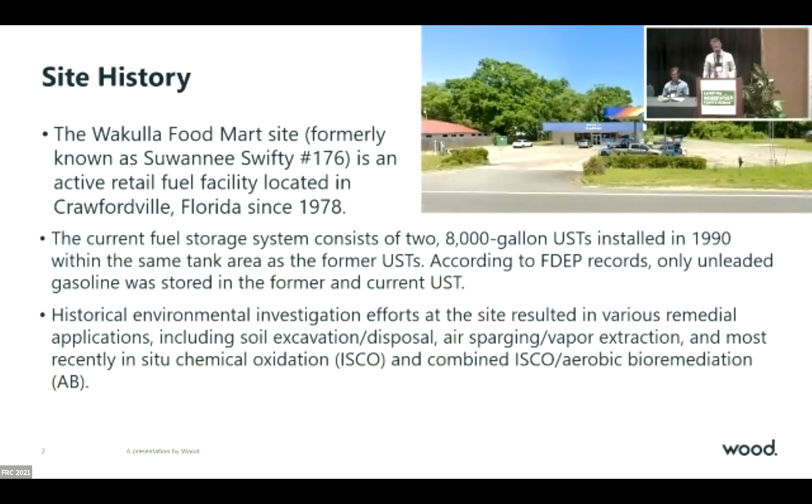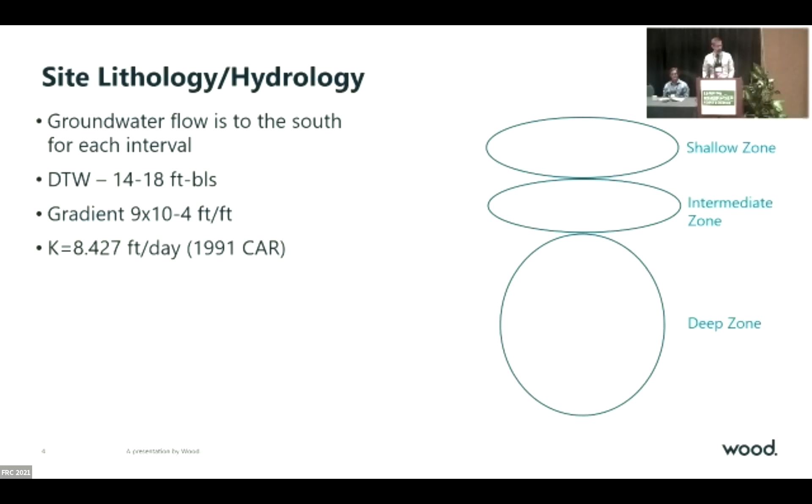So we identified three zones here, but that was just because those were the depths at which the wells were installed as we were chasing the vertical extent of contamination. There are no confining units between those zones to actually separate them from one another. Oh, there it is.

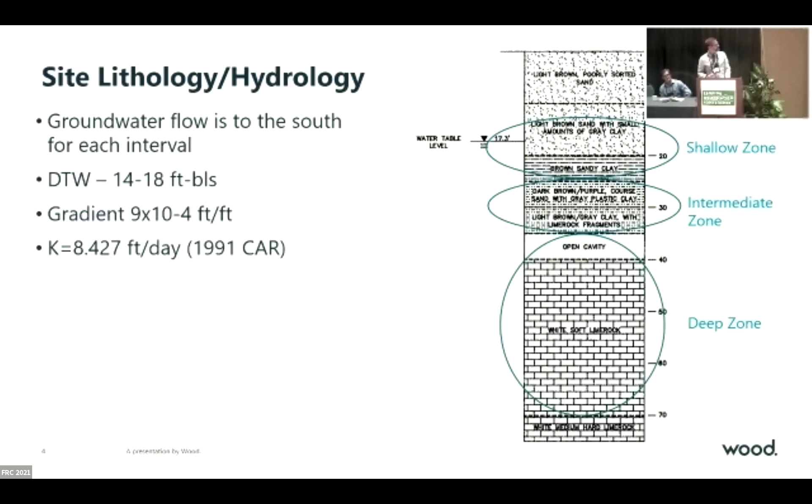Okay, so there's your lithology cross-section, like I described. Again, there was only unleaded fuel stored at this site. The discharge notification was in 1987 under the EDI program, and tanks were removed. When they removed them, they dug out about 2,000 tons of material, so there really wasn't a ton of soil contamination. Matter of fact, the CAR said there was no soil contamination on site.

Later on, they did a RAP for an air sparge, SVE, and a pump and treat system. But the SVE was just for vapor capture—it wasn't geared towards cleaning up any soil contamination. In 2013, the system got shut down, mostly because DEP was transitioning out of the petroleum pre-approval program into the PRP program. The site had reached NAM levels, so they were shutting systems down. That's the main reason the system got shut down.

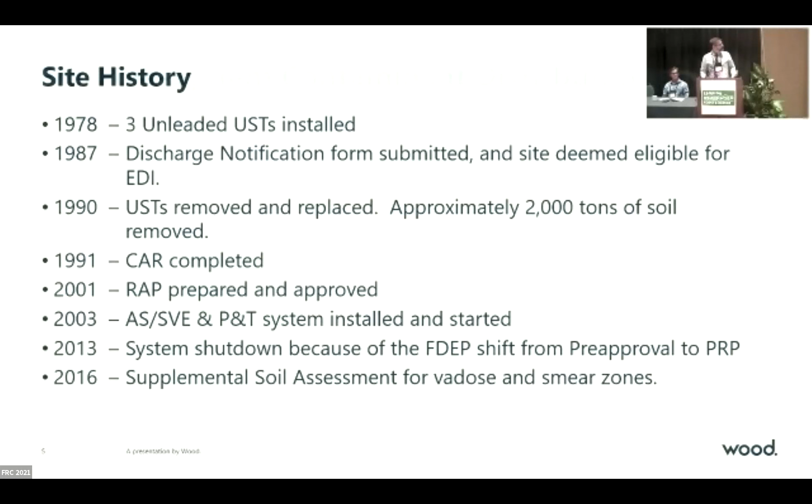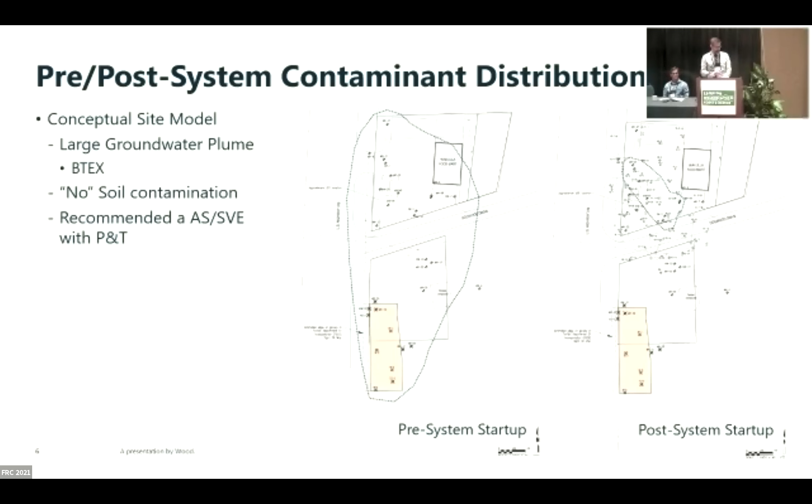So DEP authorized us to do a supplemental site assessment. We suspected there was probably still some soil contamination on site, since we were seeing increases in concentration and had rebounded above NAM, which indicated to us that it was probably a source. We went out and did a bunch of soil borings, collected soil samples, including SPLP and all that good stuff, and identified a relatively significant smear zone and some residual groundwater that we already knew we had.

There actually was no soil contamination on site, which was a pleasant surprise. But because we have a pretty good smear zone, anywhere from 14 to 18, 19 feet, and it was in that clay-ier zone, the system that was in place was just never going to cut it at this site. So we looked at pursuing a new conceptual site model that identified these things and the areas we really needed to target to move forward towards closure.

DEP authorized us to prepare a remedial action plan modification, which we did in 2016. We looked at a bunch of different options, including reinstalling a system—we did have some infrastructure still there, like the air sparge wells and SVE wells. We ultimately decided against that, and were leaning towards doing some kind of in situ remediation at this site.

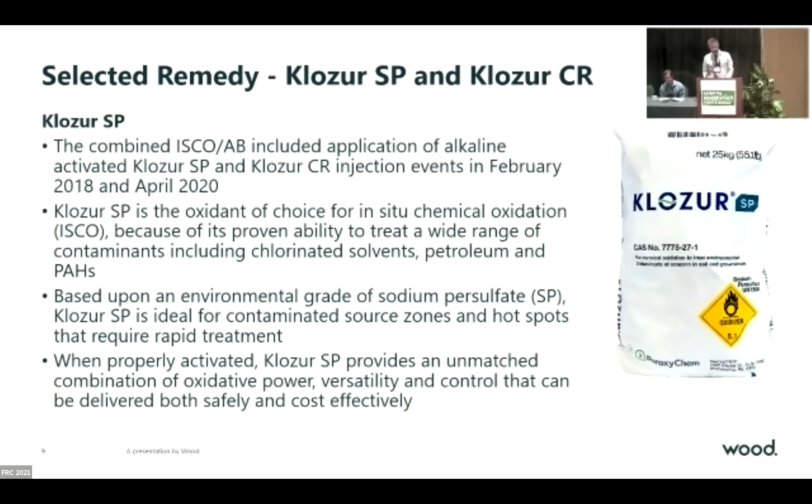So for closure, we use two products: Klozur SP and Klozur CR. Klozur SP is a sodium hydroxide activated persulfate, and we use this in the groundwater zone from about 18 to 26 feet. It's basically an NaOH activated persulfate, giving you three different radicals—a sulfate radical, a hydroxyl radical, and an O2 radical—which serve to attack the organic molecules effectively.

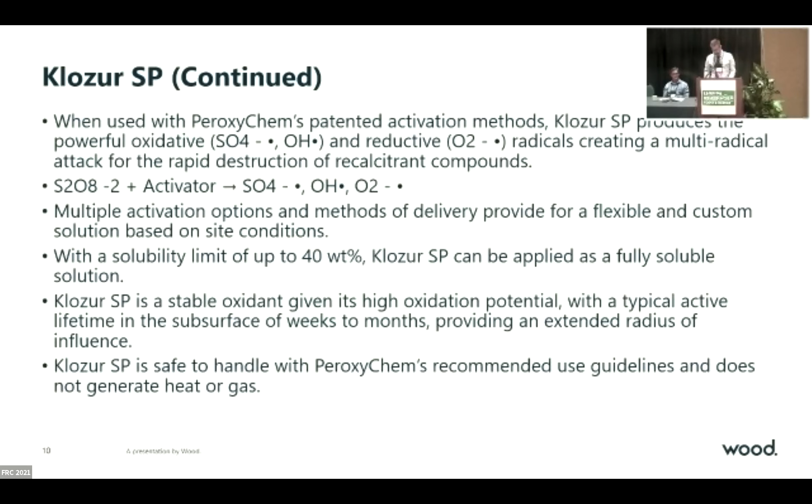Additionally, the persulfate is a longer lasting chemical compared to a Fenton's reagent. It activates in the groundwater and is persistent for generally 3 weeks to 3 months, depending on the actual site, versus something that might be over and done with in a matter of days. So it gives us a slightly larger radius of influence.

So again, the Klozur CR is essentially just the SP product combined with the Permeox Ultra, which is a calcium peroxide product that is basically self-activating. It allows us to not have to inject the sodium hydroxide. So it's a good product, and we chose it to use in the soil areas because if you're pumping the hydroxide in, we find that it doesn't work very well - it doesn't stay there, it likes to go down into the water, and so you don't get as good of activation. Whereas if you're co-injecting them together, the self-activation of the decomposition of the Permeox allows that to actively treat the soil contamination and the smear zone contamination in this case.

So the CR also, because of the Permeox, we get a big DO boost in that. So it provides, after the persulfate has done its thing, you continue to get that degradation of the Permeox, and because of that you get an enhanced bio effect afterwards. It also has been shown to provide an anaerobic bioremediation. Once that DO is gone, you have the sulfate residual from the sodium persulfate, and you can get anaerobic biodegradation from that. We have not seen it at the site, but that is a tertiary benefit to the Klozur CR.

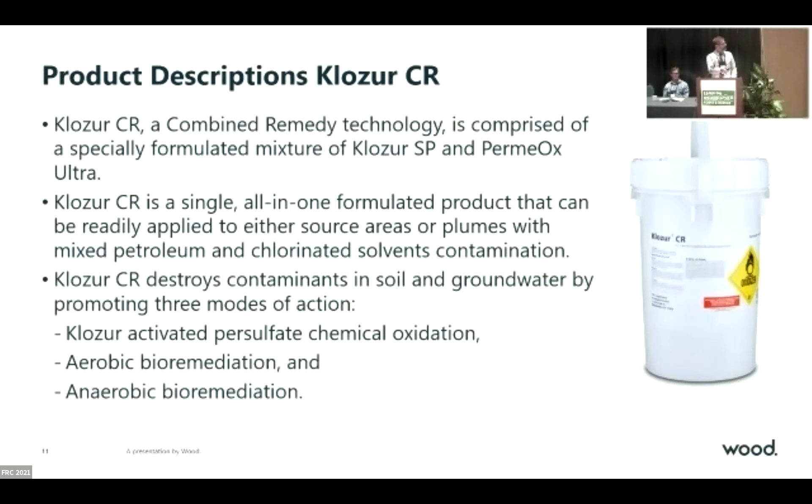So in addition to doing the phase 1 injections, the offsite property owner, who is not the same RP, said get your stuff off my property. So we went out and removed all the infrastructure. The remedial system was on a slab, and there were a bunch of horizontal or angled wells under the road here, so we removed all the well vaults and all that kind of good stuff.

And then later on in 2020, he asked us to remove the infiltration gallery, which if anybody's removed one, it's good fun. The rock was actually in quite good condition - good enough that FDOT allowed us to move it to their yard down the road, and they reused it for rock base later. So if you're in a position where you have to remove one, this was in quite good condition. I was surprised - I know John talked about a lot of iron fouling, and we expected a lot of this rock to be cemented together and be really difficult to move, but it was actually pretty easy.

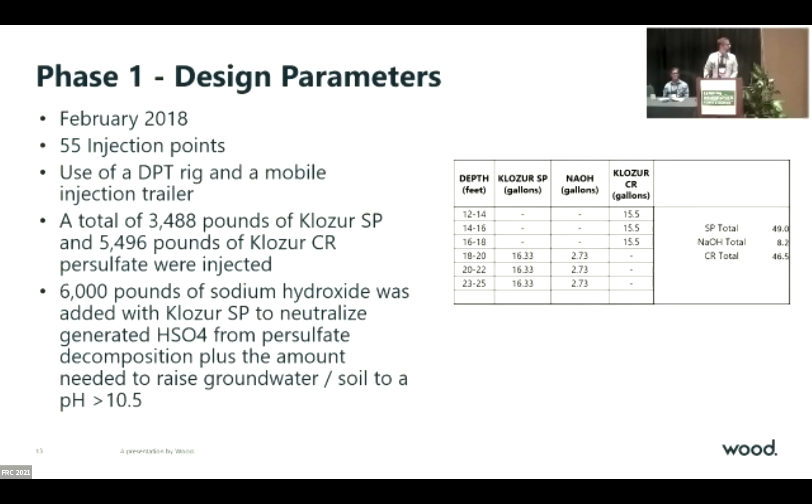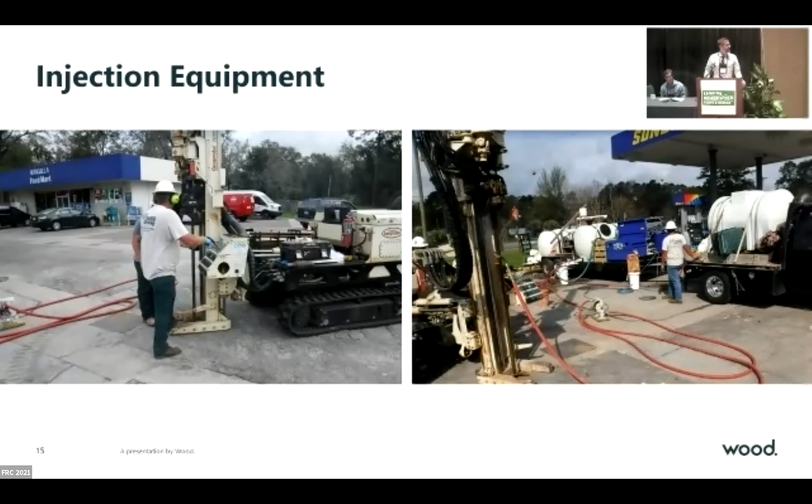Here's a photo of the phase 1 injections. Huss Environmental Drilling did this for us, and they did a great job. You can see just a regular DPT rig connecting to the top of the well - you can see we're injecting these things right there. The UST pit is right there next to the canopy and partially under it, and we injected right next to it, had no problems with anything, and it was really effective.

I guess I should've given Chad credit for the phase 2 injection, but I don't have any good pictures of them, so they didn't get included.

So, thanks, Chad. For phase 1, the injections were right at the NAM levels, but we knew we'd never get there, and concentrations were going up quarter after quarter. Xylenes were really our driving parameter, somewhere around 220 to 250, just above natural attenuation. Benzene and ethylbenzene were well below that but still above GCTLs.

And with every injection chemical we use, there's a UIC zone of discharge parameters we have to monitor. In this case, there were 5 we had to keep track of: TDS, sulfate, sodium, manganese, and iron.

The other location was the shallower zone, and it had a lot of contact with that smear zone. The other wells, even though we found smear zone concentrations in those areas, showed no impacts from desorption from that smear zone. So we really just focused on those 3 areas for the injections.

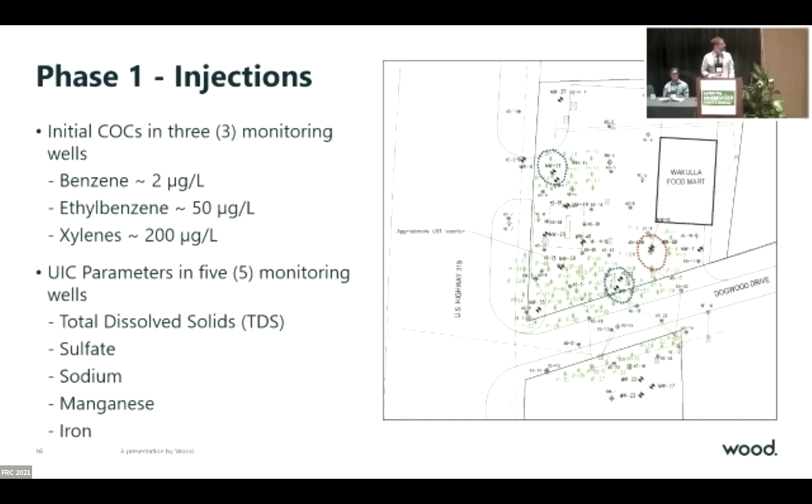So we did the injection. It took about 3 weeks to do those 55 DPT points. Afterwards, all the intermediate contamination was gone, consistently below GCTLs, and we've never seen it come back since then.

However, the area around MW6 did have some rebound. Well, not really rebound, but we only got about 50% of the reduction we wanted from the injections in MW6. But like I said, that zone had a lot more contact with the smear zone's contaminated soils, so we continued to monitor.

But here we are. Some of them went up really high like we expected, and then came down really quickly. Some others, particularly TDS at this site and a lot of sites, is the driving thing that makes you continue to monitor going forward after you get destruction. It's the case here, and you'll see after phase 2 it'll be similar - not to give you a spoiler.

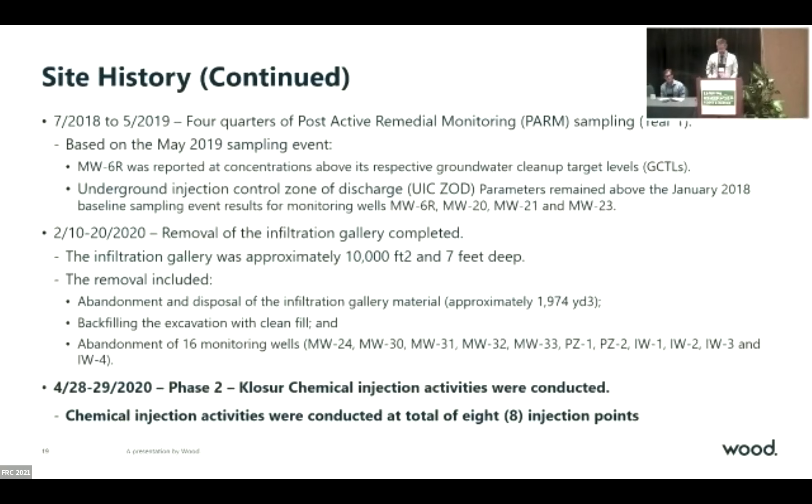So we asked DEP to allow us to do a phase 2 injection, and they agreed. We went to that MW6, spaced ourselves out from the well appropriately, and put 8 injection points around it, basically following the same procedures as phase 1.

However, this time we took a little more time because, like I said, we were having difficulty getting some of the Klozur CR into that really clayey interval of the smear zone. So we took more time under lower pressures to inject that material. It took about another three-quarters of a day or a day longer than we wanted for those 8 injection points, but we got the material exactly where we wanted it.

At the end of the day, we were able to inject 661 pounds of the Klozur SP into the saturated zone, and then 675 pounds of the Klozur CR into the smear zone.

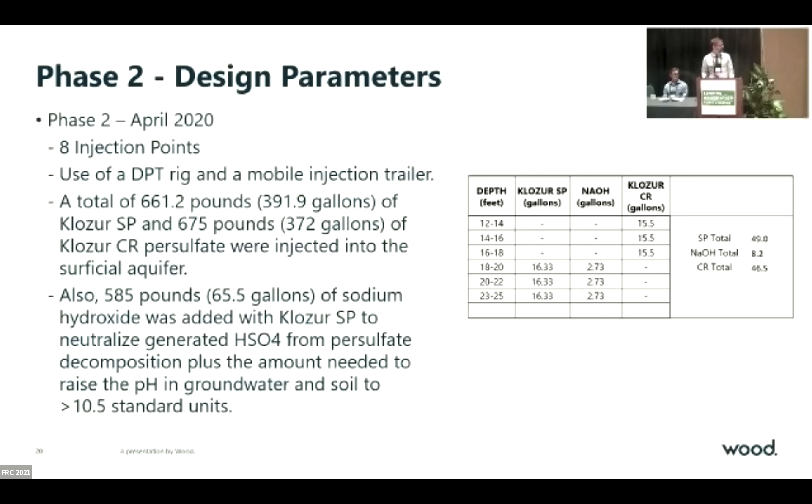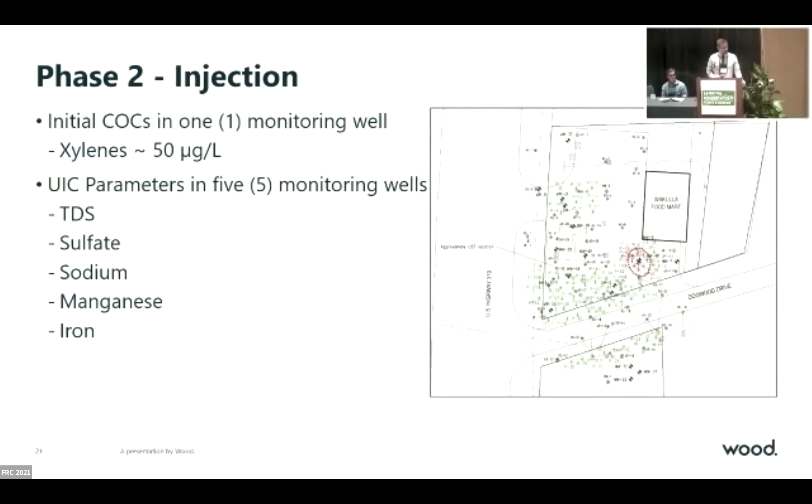And additionally, I wanted to mention, I didn't have a graph. I thought about it too late to get it into the slideshow, but I mentioned that the aquifer static conditions, the DO was about 0.2.

After we were doing these injections after phase 1, we didn't get a huge boost in DO, but after phase 2, it really went up significantly, where our DOs were in the mid 7s for probably about 6 months, and then started to drop down, and we're still above about 2.8 consistently now. So we're still have a really good DO signature that is, I think, helping to keep that plume from rebounding and providing that natural attenuation augmentation that we were hoping for.

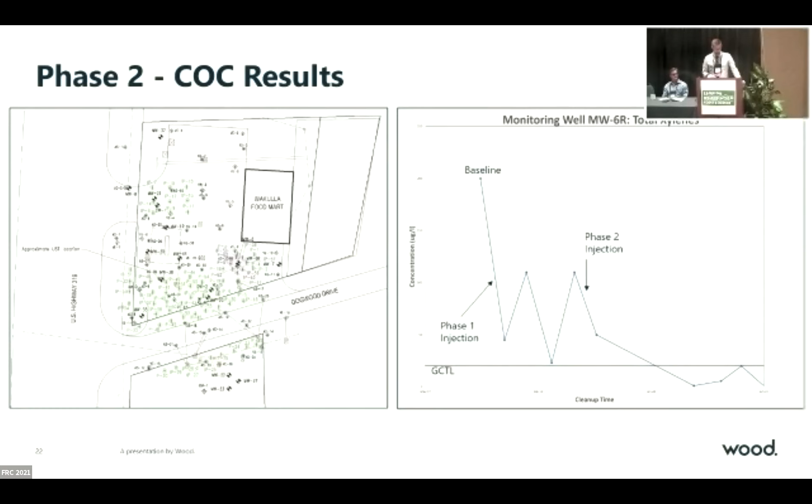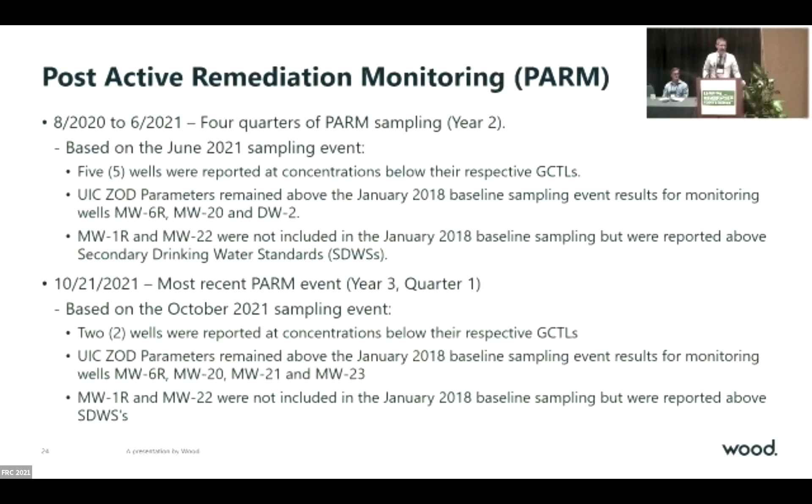So let's see. So as soon as we, again, this is just a text summary of the PARM sampling that we've been doing.

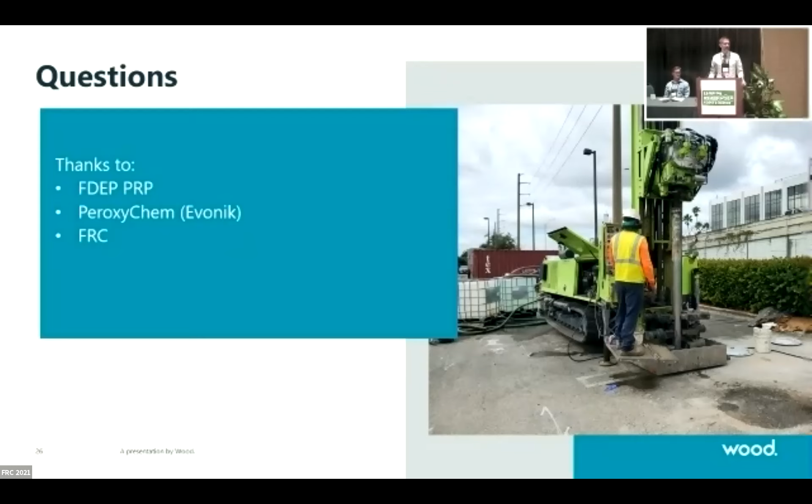If you guys came in late, part of my desire for this talk was to present a site that a lot of us might touch 4, 5, 6 times a year on a regular basis. This is stuff we do every day, and it might not be super exciting and colorful, but it's still important to know this is the kind of stuff we work on every day, and you can get success in pretty simple ways.

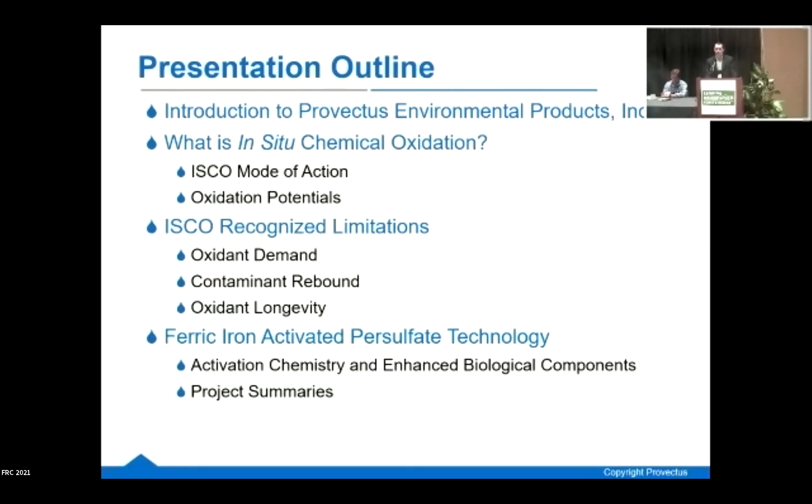And then on the back end, we'll talk about the ferric iron activated persulfate technologies that Provectus offers, as well as a couple of case studies, which will include a permeable reactive barrier approach and a backfill source amendment excavation approach. So just a quick introduction to Provectus.

We were first incorporated in May of 2014. On our day-to-day basis, we focus on environmental remediation, including ISCO and ISCR projects, as well as aerobic and anaerobic bioremediation technologies and methane inhibition. Our backgrounds include environmental consulting, remediation contracting, and the development of advanced technologies, and we utilize turnkey design and implementation partnerships across the globe to help us successfully complete project sites.

So let's dive into the technical portion of the talk. Essentially, what is ISCO in its simplest form?

That's the removal of electrons from contaminants in order to oxidize them. This is a simplified chart I like to show that basically illustrates that reaction, where your contaminant is located in the middle, and on the bottom left corner you can see that as it loses its electron, it becomes oxidized. That's essentially what ISCO is.

The thing I like to point out about ISCO is that it's also a non-selective technology, meaning that when these chemicals are applied, not only will they target the contaminants of concern in the subsurface, but they will also oxidize any naturally occurring organics as well. So just keep that in mind when using these technologies.

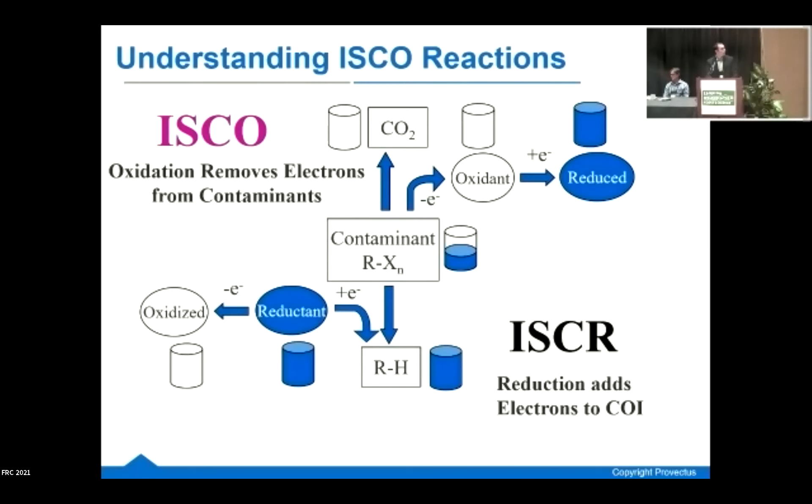As we know, the stronger the oxidizer, the higher the oxidation potential you're going to have. And within the class of ISCO technologies, there are many reagents you can utilize, from Fenton's to persulfate to hydrogen peroxide to permanganate. These all have various oxidation potentials.

Up towards the top end of this chart, we can see the hydroxyl radical, which is commonly formed in Fenton's reagent. This has the benefit of being able to treat a wide range of contaminants, but it does have a few drawbacks, such as the short lifespan in the subsurface, and it can also be difficult to apply in reactive soils.

Just below that, we have the sulfate radical. This is common in activated persulfate. And I'm going to distinguish here a little bit between what I call common activated persulfate, as well as the ferric iron activated persulfate that Provectus offers. So when I'm referring to common activated persulfate, I'm talking about persulfate that would be activated through sodium hydroxide, or alkaline activation, or activated via iron or thermal. That's just to distinguish what Provectus offers.

With the sulfate radical, that can also treat a wide range of contaminants similar to the hydroxyl radical. But one of the benefits is it forms a little bit slower, so it can allow for a larger radius of influence in the subsurface. With what Provectus offers with Provect-OX and Provect-OX2, those will also form the sulfate radical, and they have the benefit of also being able to form ferrate on some sites. In addition, they can help prevent contaminant rebound by utilizing the residual iron and sulfate for some back-end bioremediation. So the ferric iron activation offers some advantages over common activated persulfate.

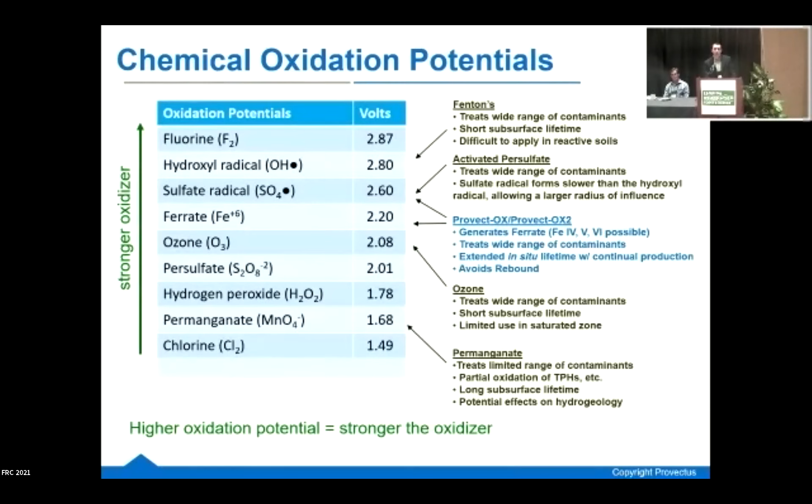If you're looking at other contaminants of concern, such as BTEX, that requires a little bit less energy. But something like permanganate or hydrogen peroxide wouldn't necessarily generate enough energy to effectively remediate BTEX or some of your longer chain hydrocarbons. So you just want to make sure, depending on what your contaminants are, that your oxidation technology is going to be able to generate enough energy to effectively remediate your contaminants of concern.

Let's dive into three of the main issues I see with chemical oxidation. The first is non-beneficial consumption. The way I like to think about it when designing a project site is that your required oxidant demand is really a mathematical formula of two components. The first part of that formula is the stoichiometric demand of the contaminants.

I think this is the easier section to figure out. Assuming your site's been fairly well delineated and you have a strong understanding of the groundwater and soil concentrations, this is very easy to calculate for your project site. Just to give a quick example, if you have 1 pound of benzene at your project site, that requires approximately 50 pounds of persulfate in order to effectively remediate it.

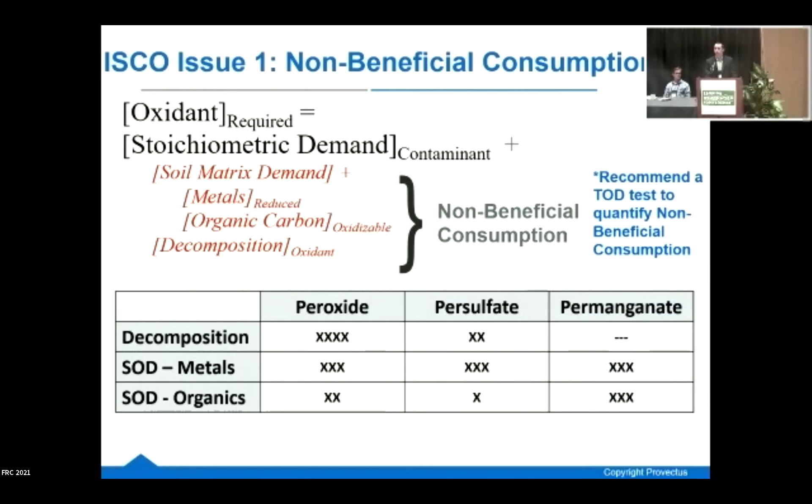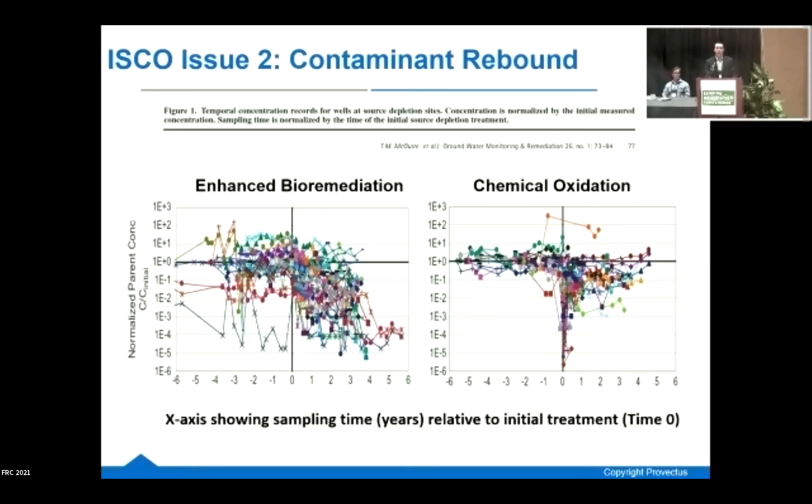If we look at the enhanced bio chart on the left, at time zero we don't have nearly as much contaminant destruction. But as the time plot moves further out, we see more and more contaminant destruction occurring. This corresponds with our understanding of bioremediation — it's a slower technology to work in the subsurface, but it provides more longevity compared to chemical oxidation. The real sweet spot would be combining the two classes of technologies to get upfront reductions from chemical oxidation and sustain those reductions with bioremediation on the back end.

The third potential issue I see with chemical oxidation is related to the longevity of the reagents. Let's think about this hypothetically: if you have a project site with a plume that's been leaking in the subsurface for 30 or 40 years, that contaminant has migrated into all various pore spaces and preferential pathways. Over time, the plume gets delineated, different technologies get evaluated, eventually a RAP gets implemented, and say chemical oxidation is selected. Now what we're looking to do is apply a technology that may only last minutes to hours to weeks, for a plume that's been migrating for potentially decades in the subsurface.

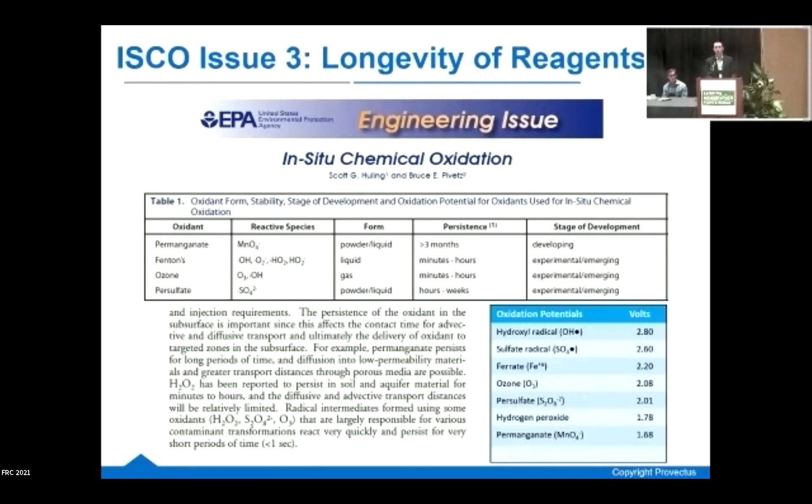You can see something like ozone or Fenton's reagent will only last a few minutes to hours in the subsurface. Whereas something like persulfate or permanganate will give you a bit more longevity — say weeks to potentially a couple of months.

At Provectus, we offer two technologies called Provect-OX and Provect-OX 2. Not very creative on the naming, but they work great in the industry. Provect-OX is a sodium persulfate blend combined with a ferric iron activator, and Provect-OX 2 is a sodium and potassium persulfate blend also combined with the ferric iron activator.

Following implementation, both technologies quickly flip the geochemistry aerobic, so you'll see significant increases in your ORPs and DO values. You get chemical oxidation reactions on the front end, and as those reactions run their course over a few weeks to potentially months, you get sustained bioremediation on the back end due to the residual iron and sulfate. So they transition very well from chemical oxidation to bioremediation.

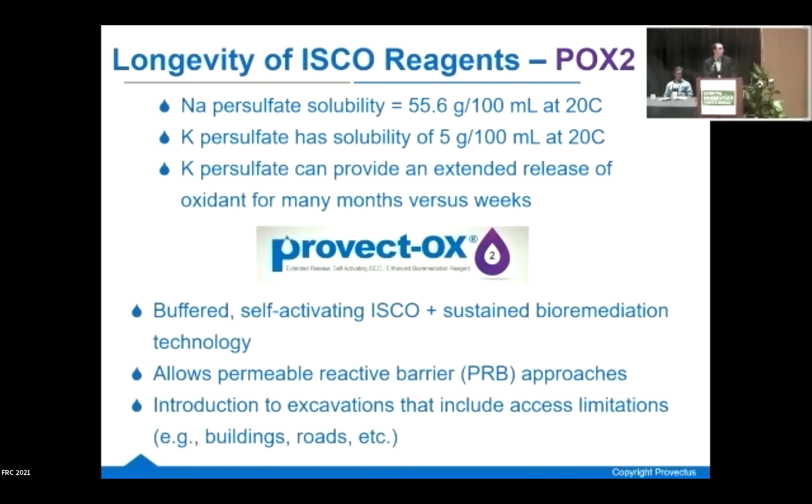Let's dive into a couple of the case studies. The first one is from a site in Madison, New Jersey, where we worked with an engineering and land planning firm. This site consisted of LNAPL, BTEX, and trimethylbenzene impacts.

Before any in situ work, they utilized excavation to remove some of the overburden, and also did an EFR event to remove most of the LNAPL. There was still a little bit of residual remaining in one well. Following that remedial work, they were left with about a 1,500 square foot area to remediate in situ, with our target vertical zone being from 25 to 40 feet below ground surface. Depth to water was about 30 feet.

So here we were targeting the smear zone and saturated zone. The site geology consisted of dense silts and clays. In total, 8,500 pounds of Provect-OX were applied in order to significantly reduce the residual mass following the excavation and EFR events.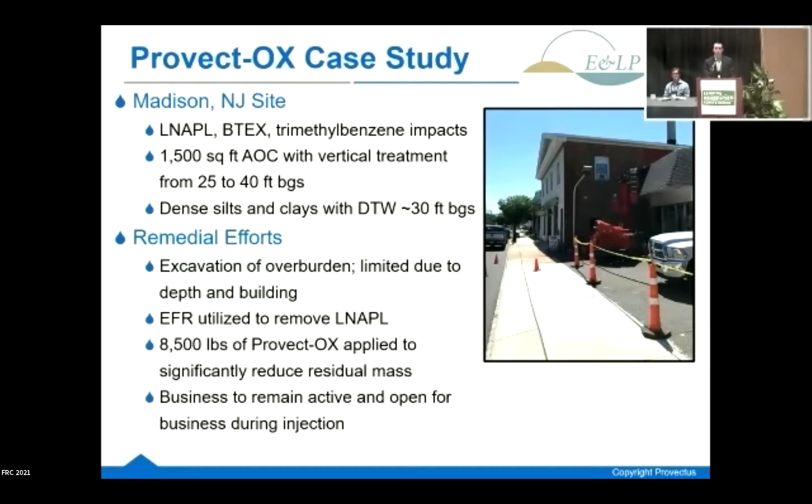As promised, I have some geochemistry from this site. Initial baseline conditions from our two target wells showed strong reducing conditions, with ORPs both greater than negative 100 millivolts. Following application of the Provect-OX, we completely flipped the geochemistry, and our ORPs went strongly on the positive side, creating aerobic conditions.

About 3 months following application, baseline conditions returned as anticipated based on the longevity of the sodium persulfate and the Provect-OX. Now you would have the opportunity for the residual iron and sulfate to take over for bioremediation on the back end.

As far as the VOC results, we have great results here. This data is only about 12 months old, so we've run the course on the ISCO portion of the product, but we still anticipate more reductions going forward with the bio. From the first well, MW6R, we had great results—both the BTEX and trimethylbenzenes went down by more than 90%.

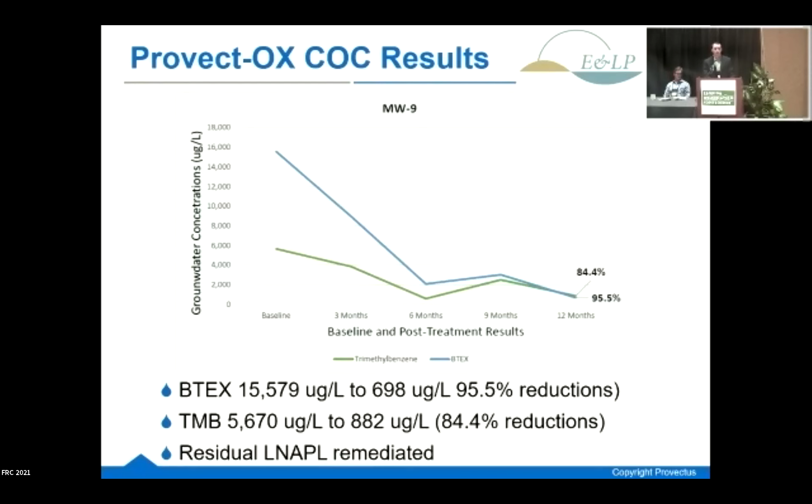At MW9, where we had the little bit of residual LNAPL, that's been completely remediated. The BTEX has gone down by about 96%, and the trimethylbenzene by about 85%. Great results, only about 12 months into the project site so far.

The second case study is from a project site on the East Coast of the US. This was an open excavation that contained BTEX and naphthalene contamination. The client utilized Provect-OX2, blending it into the open excavation, with their remediation goal just to achieve significant mass reduction here.

In total, they observed about 95% reductions in the BTEX components, as well as about 85% reduction in the naphthalene. The top right picture shows the Provect-OX2 super sac being opened up, letting out the nice red product into the open excavation.

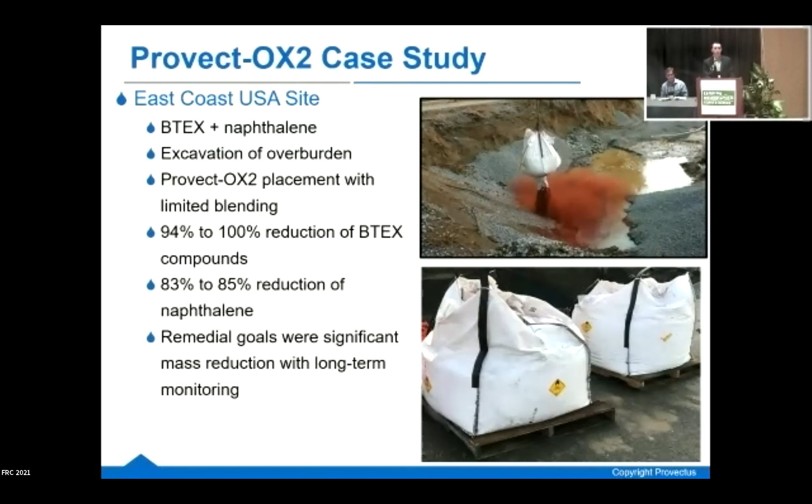When you're blending that material in, it's very easy to see the color and see where you've mixed the material. Just below that is a picture of the product staged in super sacks, which is one of the two packaging options we offer.

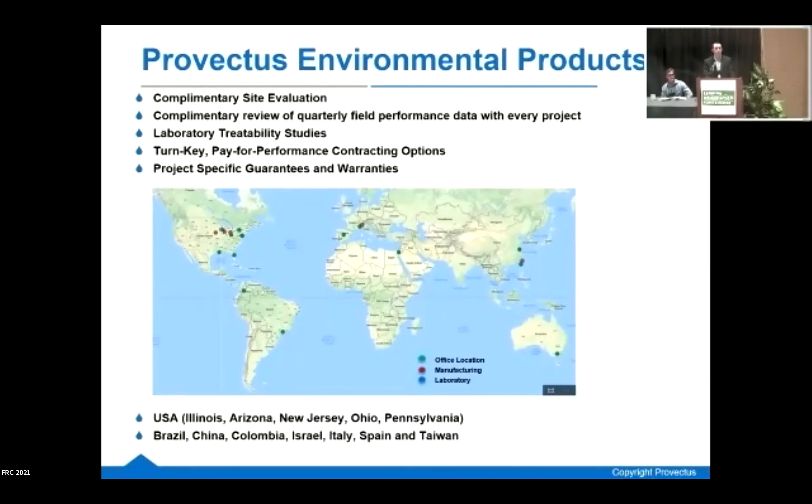Yes, go ahead. I believe that's classified as a PAH, so I would classify that probably in the top column there, for the 2.5 volts. Anyone else?

All right, well, I guess that's it. Thank you very much, everyone. I appreciate it. Thank you, Andrew, appreciate it.

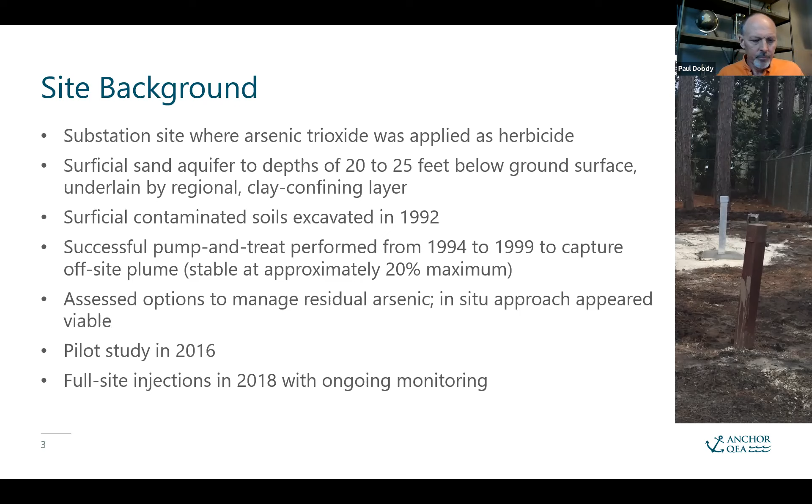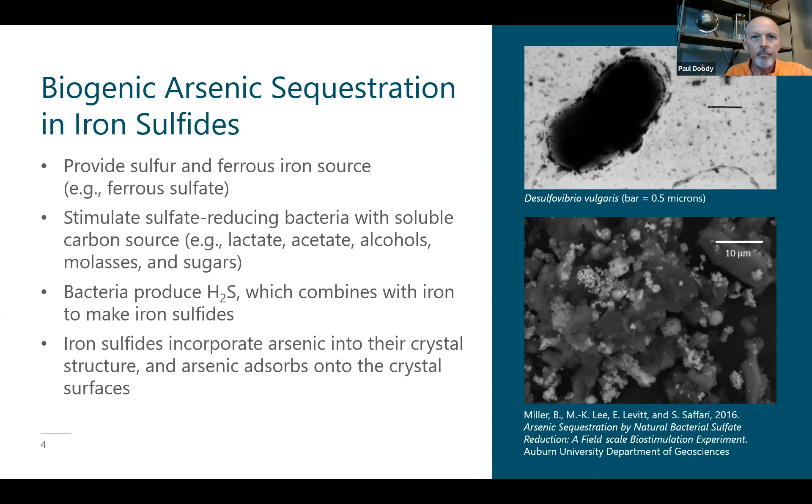Some investigations back in 2005 found that black precipitate was collecting in the bottom of some of the monitoring wells at the site. Data we collected indicated that the precipitate contained arsenic, iron, and sulfur, and that the levels of arsenic in that precipitate were on the order of 0.2 to 1%, which is highly concentrated. The levels in the groundwater at the site are generally at the sub-ppm level, so it's highly concentrated in the precipitate.

We determined that we were able to accelerate that process in the laboratory, but wanted to test that in the field with a pilot study. What's shown here is a figure of the site, about 0.3 acres in size, so you can imagine a substation, not a real big property size-wise. The blue arrows indicate the general direction of groundwater flow, which is in the northwest to westerly direction. The existing monitoring wells used during the pilot study are shown there in green.

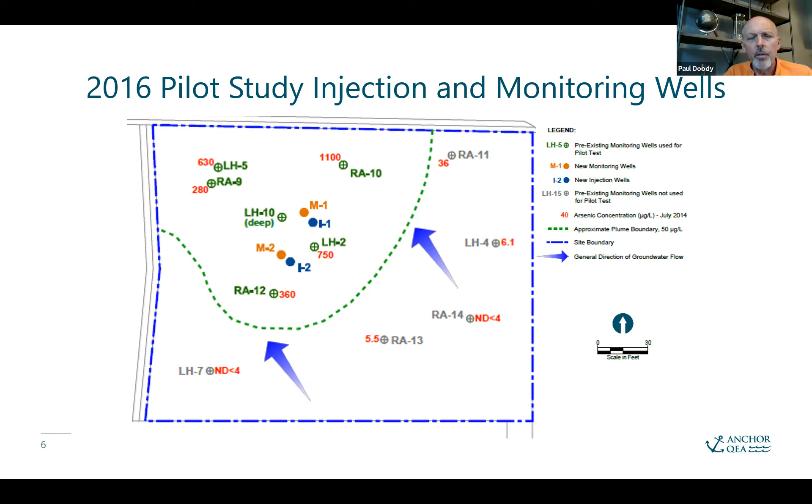So the injection solutions that we tested during the pilot, we did 2 different solutions. One was more concentrated than the other, and also varied the total volume of fluid that we applied in each of the wells.

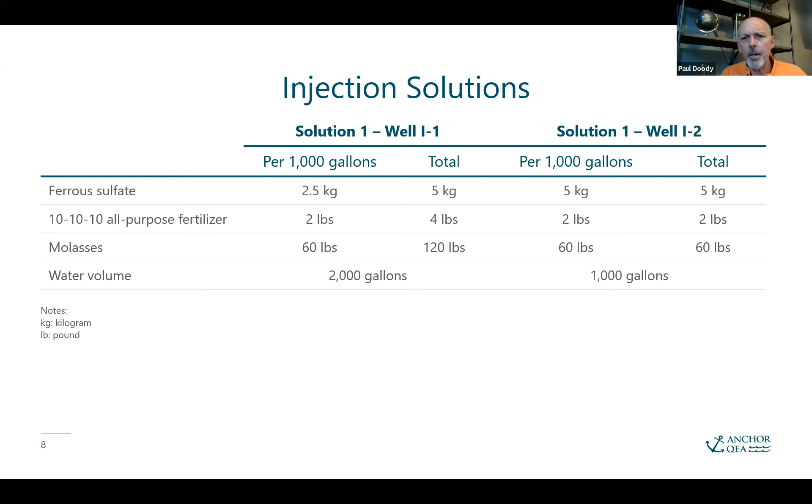The solution consisted of water. We used demineralized water from a local power plant. There was some concern with using chlorinated water and that it might affect the biological activity, so we used demineralized water and added ferrous sulfate. You can see the amount of ferrous sulfate that was added. We also added a fertilizer and molasses, and as mentioned, tested 2 different solution strengths.

Pretty simple process, a tote tank where the materials were mixed. You can see the gravity drainage hose that would run out to each of the injection wells, and use the valve there to do some primary control of flow.

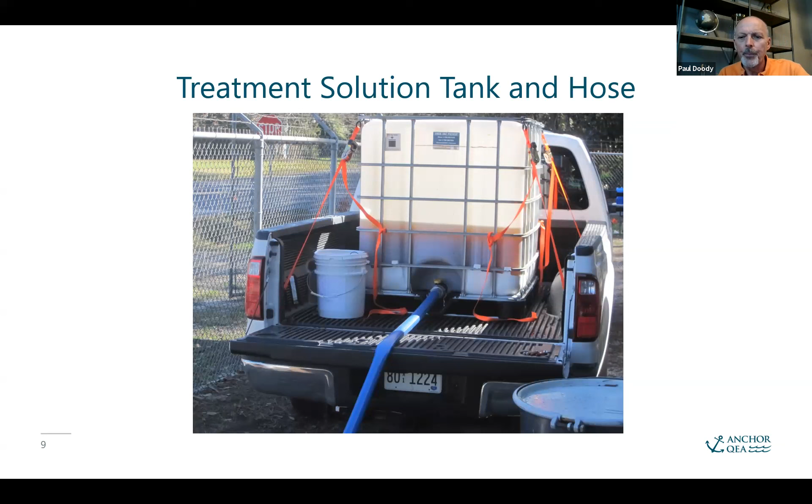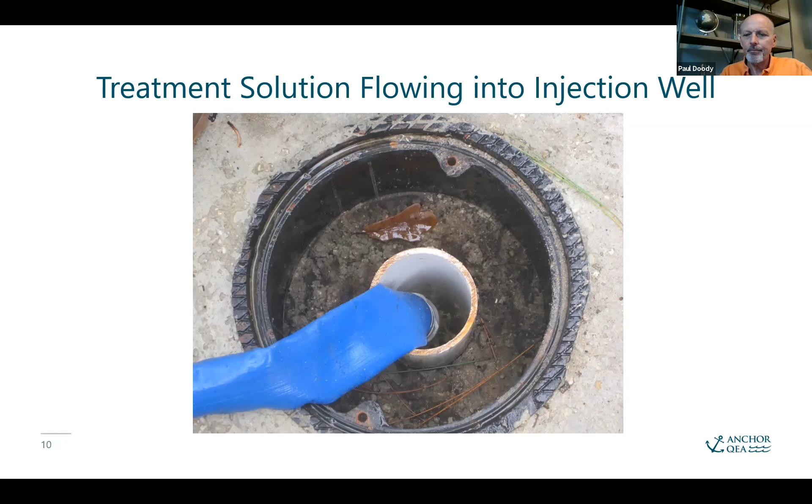And then at the well itself, we had an observer there full time during the pilot study. The intent was to try not to create too significant groundwater mounding, so the operator regulated the flow basically with his foot, just to keep the flow so we weren't increasing the elevation in the well too dramatically. So a pretty simple process.

Some of the findings we had were that we did see sulfide precipitates forming in the wells. We analyzed that precipitate, or Auburn University did a lot of this analytical work. They identified that precipitate as pyrite. They also detected iron, sulfur, and arsenic in those precipitates, and identified the sulfate reducing bacteria, kind of all 3 pieces of evidence we'd seen historically, but we were also able to document occurred during the pilot study. We also saw the geochemical changes we had expected, changes in ORP, H2S concentrations, iron and sulfate concentrations as well.

I'd mentioned earlier, we saw the lighter isotopes of sulfur accumulating in the solids and the heavier isotopes in the groundwater. And most importantly, we did see a decrease in arsenic concentrations in the groundwater.

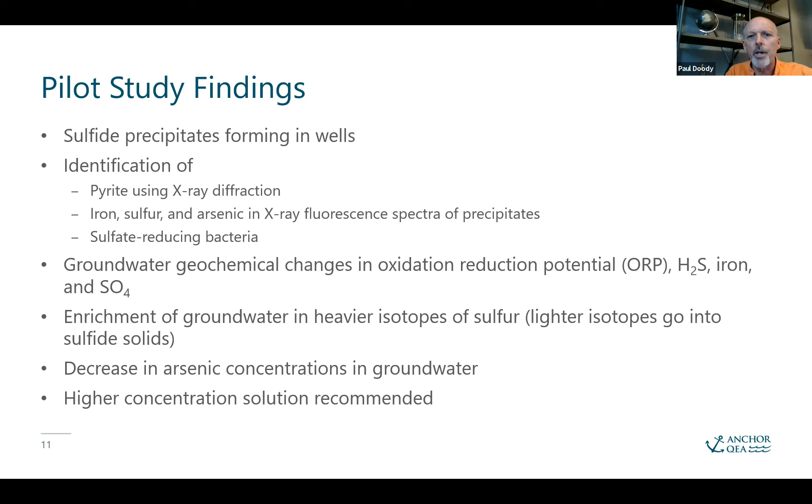Finally, as I indicated, we tested 2 different solutions. The reason we did that was to make sure that the higher concentration fluid didn't inhibit the sulfate reduction, but would allow us to apply less water to the aquifer. We ended up showing that the higher concentration solution was acceptable, so we recommended that for the full site remedy. So I'll go through some of that information from the pilot.

I had mentioned these black precipitates that form in the wells. One of the ways we collected this was we put in sand packets. You can see the picture on the left before they were installed, and then retrieving them after the pilot study. You can see them on the right with obvious black staining, and we were able to obtain enough of that precipitate to run some of those analyses I had mentioned.

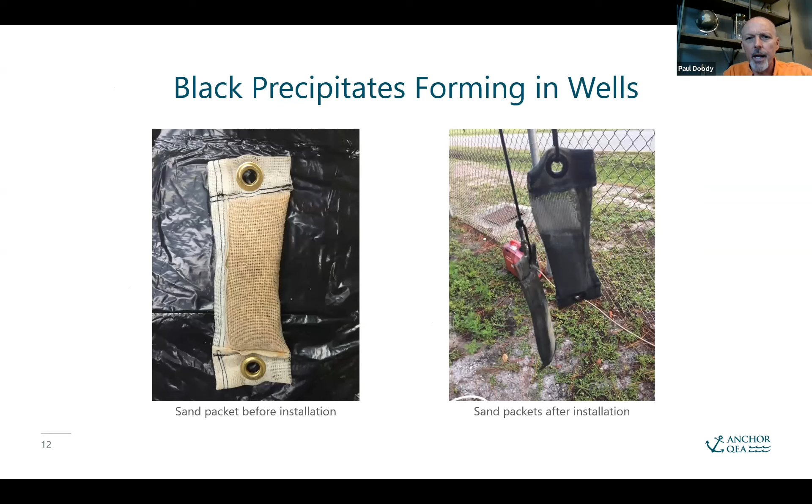We also did some analysis of those, this X-ray diffractogram. The red peaks you see there are indicative of pyrite, and the samples that Auburn University ran matched an Arsenian pyrite with the formula that's noted in the figure.

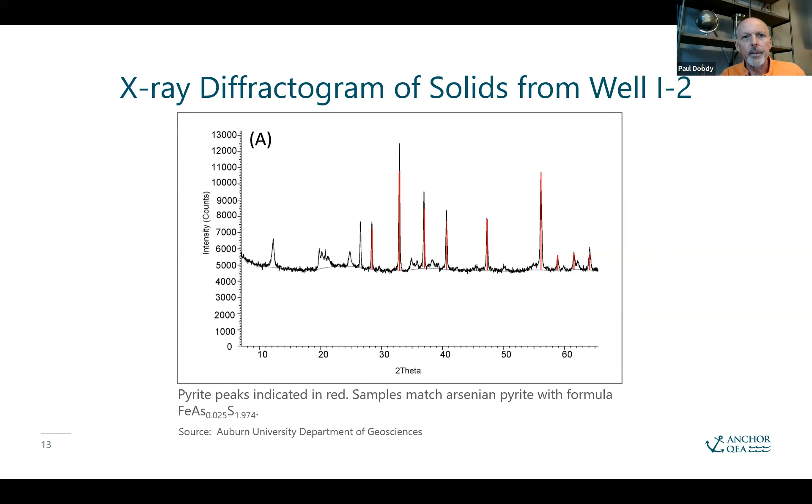We also wanted to point out some of these water chemistry changes over time. I'll explain this graph for you. The x-axis here is time in days. We ran this for, I believe, 9 to 12 months, and we're just showing the first 6 months here. The left-hand y-axis is the concentration of iron and sulfate, that's a linear scale. On the right-hand y-axis, we've got the concentrations of arsenic and H2S, and that's a log scale. We did that mainly so we could see the changes over time with each of these parameters. The red line is that arsenic standard of 50 micrograms per liter.

A couple of key observations here: you'll see the green and black lines, which are the iron and sulfate concentrations. No surprise, after the injections at day 0, you saw an increase in those, which is what you would expect. The H2S concentrations also went up, indicating we're getting that sulfate reduction into H2S. And the arsenic concentrations in the blue line, you can see dropped from what they were before or at day 0, down actually below the standard in that particular monitoring well. This was the monitoring well that was installed just down gradient of the injection wells.

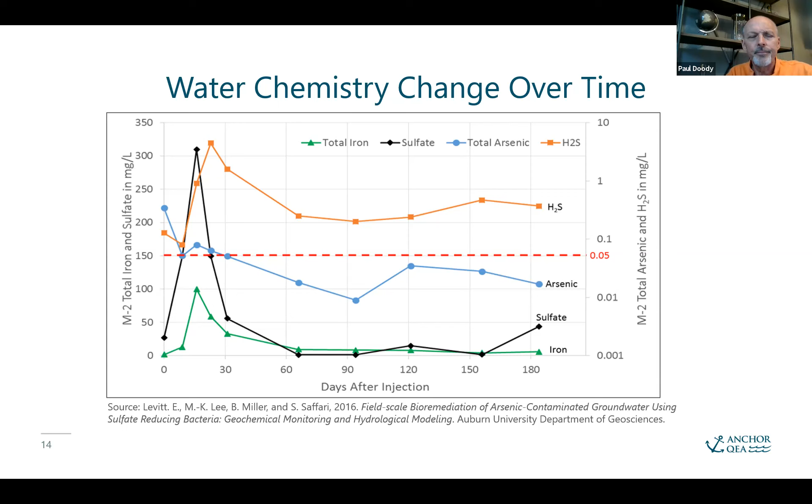We wanted to make sure we weren't seeing a rebound here based on the data.

We didn't see any increase in the iron, sulfate, or ORP in those monitoring wells, which indicated to us that these sulfides were not dissolving. So the consensus is that the arsenic increase we saw wasn't due to a rebound or dissolution of the arsenic out of the pyrite that had been forming, but rather was due to untreated groundwater that had moved into the area of the monitoring wells.

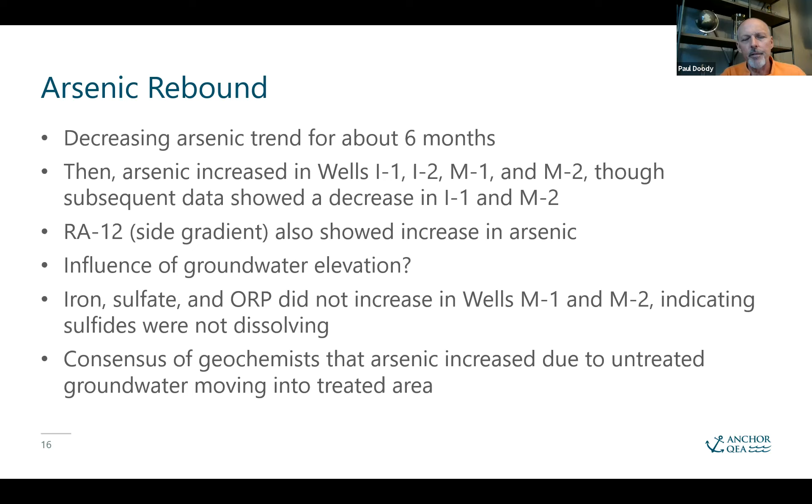So we moved ahead with the full site injection, and one of the things we wanted to make sure we did was capture and be able to inject our reagent into all of the areas where we had arsenic above the standard of 10 micrograms per liter. So we installed a number of temporary well points, about 20 of them throughout the site, to help guide where we would put the injection wells.

We installed a total of 11 injection wells, shown in yellow or orange on your screen. Those are the injection wells. One or two of those were installed during the pilot, and then we added 9 injection wells to use in the full site remedy. The black and white wells are the existing monitoring wells at the site, and the groundwater flow direction is shown in blue.

We injected about 6,600 gallons of that higher concentrated solution, ending up being about 500 to 1,000 gallons per well. We basically hopscotched around each of the wells and injected 250 gallons at a time in each well.

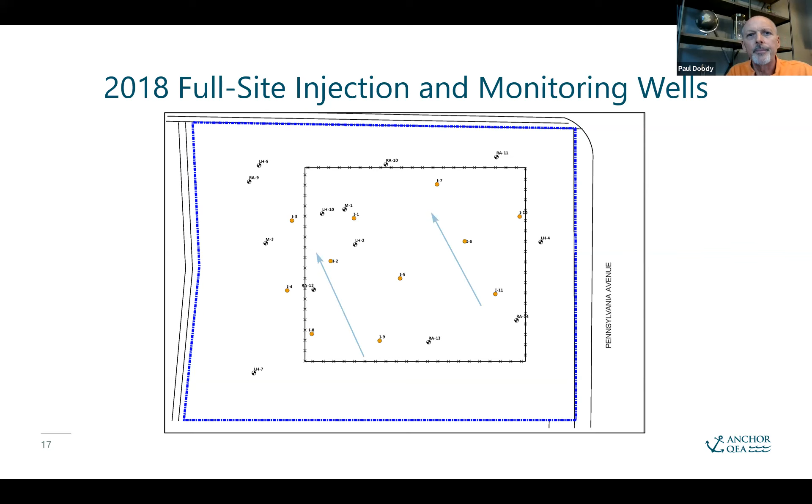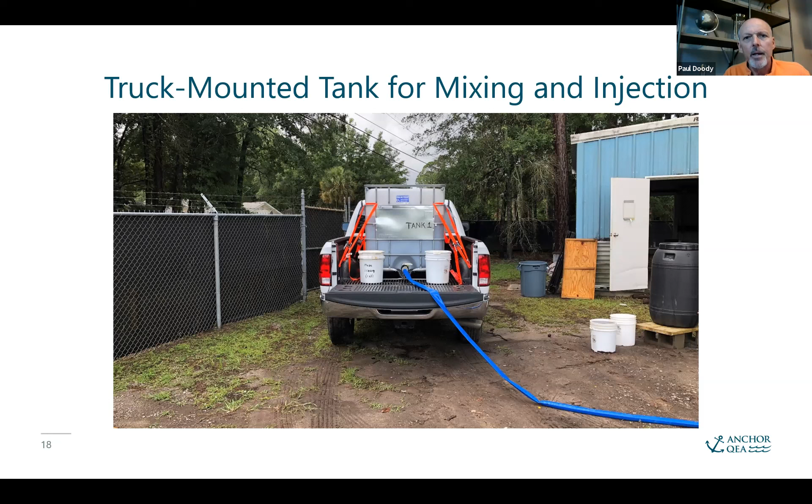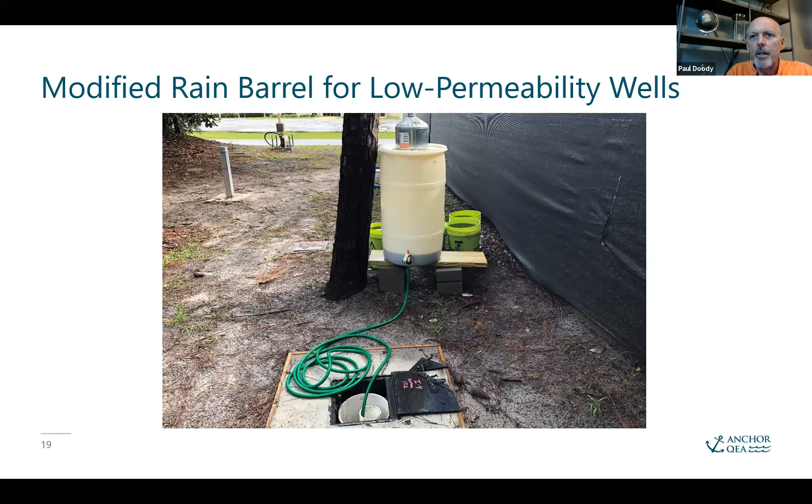We did this in 2018, basically the same setup with that truck mounted tank, where we mixed things and then gravity drained into each of the injection wells. We used a modified rain barrel for some of these low permeability wells, which allowed us to run a lower flow into those and not have to man the operation full time like we were with the larger tank. We did that at 3 of the wells.

One thing I would point out is we've been monitoring through 2021, and through the data we've collected to date, the arsenic levels have been holding and still below the pre-injection concentrations.

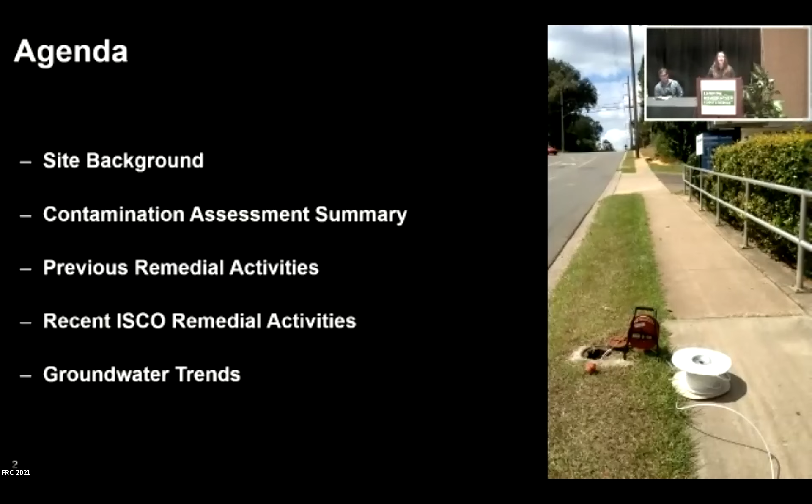All right, so our agenda for today: we're going to first give a brief site background, and then we're going to provide a summary of the previous contamination assessment as well as the previous remedial activities. We'll discuss the recent ISCO remedial activities and then finish up with a review of our groundwater trends. So Derek's going to start us off with our site background.

Good afternoon, everybody, and thank you, Jenna. So the Time Saver 11 facility is a former retail service station located in a predominantly residential area of Tallahassee. The facility operated as a retail service station beginning in 1985 when 3 unleaded gasoline USTs were installed. The USTs and dispensers were located in the southeast portion of the site, as you can see in the 2011 aerial photograph. So it's kind of right there where you can see the canopy structure.

And in August 1990, a petroleum release was reported following discovery of a broken fiberglass pipe, and an estimated 1,000 gallons of unleaded gasoline was released prior to detection. So the site was deemed eligible for state-funded cleanup under the Petroleum Liability Insurance and Restoration Program and has a current priority cleanup score of 61.

Initial remedial activities conducted at the site included the removal and replacement of the USTs and the excavation and disposal of approximately 420 tons of petroleum impacted soil to depths of approximately 14 feet below land surface. Fueling continued on-site until 2008 when the replacement USTs were removed. No additional storage or fueling has taken place on site since that time, and the canopy and fuel dispensers were ultimately removed in 2011. The site is currently used as a convenience store only, as depicted in the 2021 photograph.

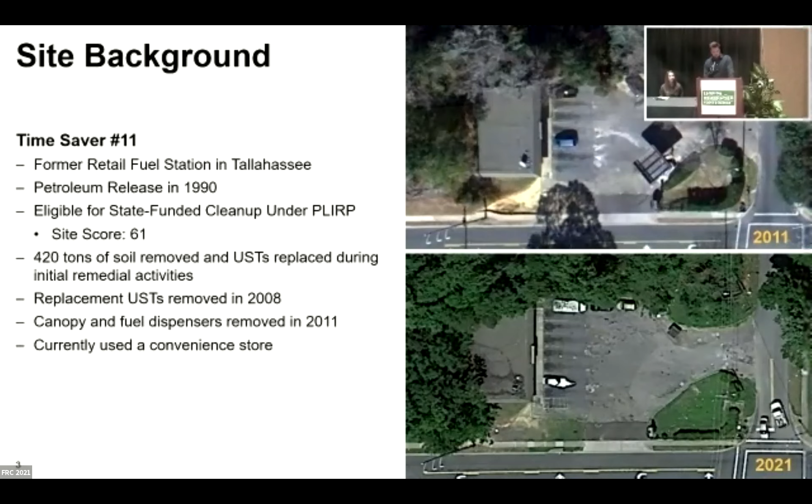Okay, so now I'll go over some of the initial contamination and assessment activities conducted at the site and the extent of the impacts. So the site assessment activities were conducted by others between 1996 and 2008. The soil impacts were identified in the former UST and dispenser area in the southeastern portion of the site, and extensive groundwater impacts were identified, which extended eastward offsite in the direction of groundwater flow.

So right here was where the old canopy structure was. You can kind of see the plume extending offsite in the eastward direction here. The petroleum impacts migrated over about 750 feet eastward, and that extended into a stormwater retention pond right here and continued further beyond that.

And vertically, the impacts were detected at depths greater than about 45 feet. The water table at the site has varied considerably, with the depth of water ranging from about 12 to 20 feet in the shallow wells, and then from about 20 to 45 feet in the deep wells. The site also has a complex lithology consisting of alternating layers of fine sands, silty sands, clays, and limestone.

So several pilot tests were conducted by others at the site in order to develop a remedial strategy, including air sparge and soil vapor extraction, as well as a pump and treat test. However, AS/SVE was determined not to be an acceptable remedial strategy due to the complex lithology at the site, including a perched aquifer, confining clay layers, and inconsistent lithologies. Similarly, groundwater extraction and hydraulic control pilot test was determined not to be an effective remedial strategy due to the low groundwater yield of the formation.

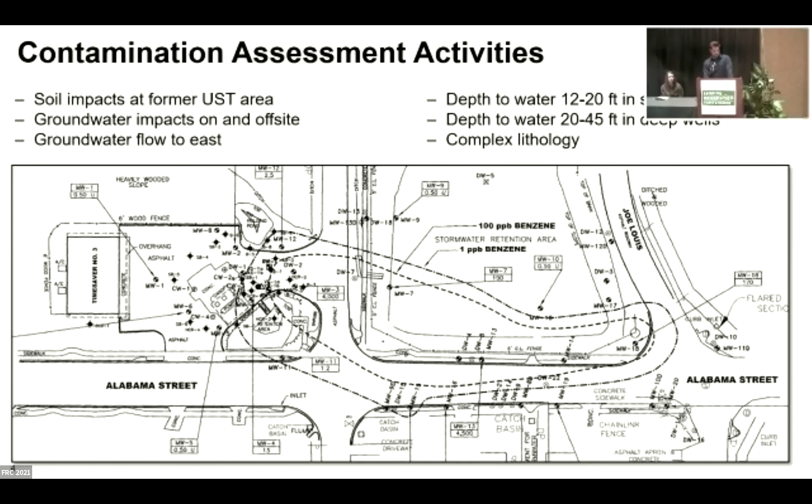Since previously mentioned remedial strategies were deemed ineffective, previous consultants prepared a RAP for source removal via large diameter augers to remove the vadose and smear zone soil impacts and reduce further migration of the down gradient plume. In 2008, soil excavation activities consisting of 68 LDA borings were completed to depths of approximately 25 feet. An oxygen release compound was placed in each borehole prior to backfilling with flowable fill to promote further bioremediation of the groundwater.

In total, approximately 1,700 tons of soil was excavated and disposed of off-site. However, groundwater concentrations remained substantially unchanged from the 2007 concentrations, and it was suspected that smear zone impacts remained between the LDA borings and the nearby street, Joe Louis Street, to the east, where these impacts were inaccessible for removal due to the presence of underground and overhead utilities.

So following the LDA excavations, a RAP mod was proposed in 2013 for ISCO and bioamendment injections, targeting the on-site groundwater plume and any remaining smear zone and soil impacts that were previously inaccessible. ISCO with bioamendments was selected as it has been successfully utilized in restrictive formations like the clay soils encountered on site, where desorption of petroleum contaminants typically limits the use of conventional technology such as AS/SVE or pump and treat, as the pilot testing for these two strategies demonstrated.

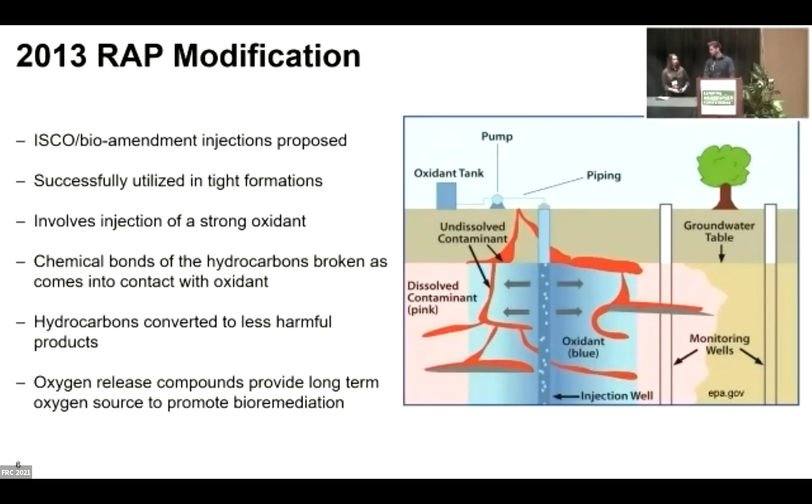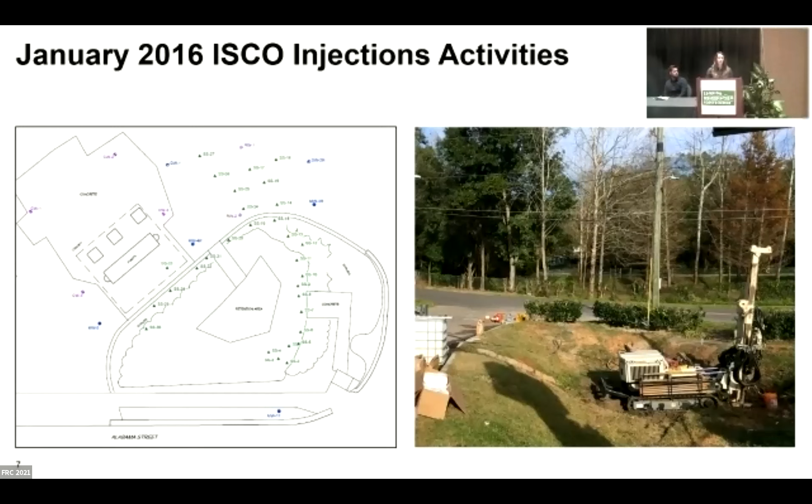So the second event was conducted in May of 2016, and similarly, we injected the ISCO and bioamendment material into 30 different injection points. And again, with that interval of 12 to 30 feet below land surface, targeting that smear zone area as well as the shallow groundwater impacts.

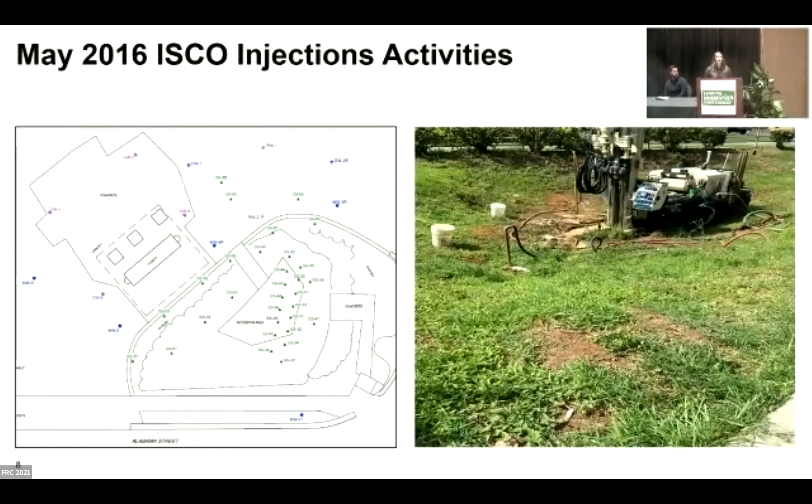So following the injection activities, we conducted groundwater monitoring through 2018, and you can see that the extent of our plume did shrink and the concentrations in some of our source area wells did decrease, especially along the eastern boundary of the property. However, they still remained above GCTLs and even NADCs. And we also had significant impacts that remained south of that City of Tallahassee retention pond to the east.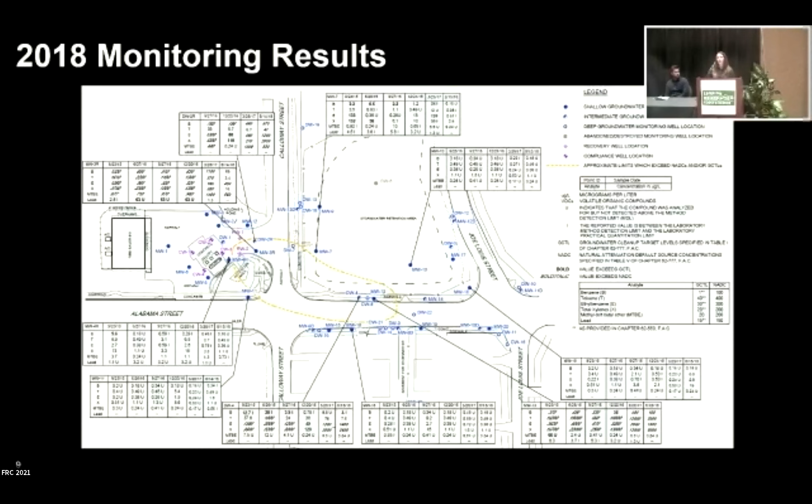So in order to try and target those remaining impacts and to expedite the site cleanup process, we proposed the preparation of a RAP mod for additional remediation.

So during the development of our RAP mod, we were again limited in the type of remediation we could use due to the complex lithology, the presence of overhead and underground utilities, as well as the extent of the plume that was present beneath the roadways.

So we proposed additional ISCO injections, but we proposed doing them to deeper depths of 20 to 50 feet below land surface to try and target both the shallow groundwater impacts as well as the deeper groundwater impacts that were present. And we also proposed angling those injection borings.

And then we also received approval from the city of Tallahassee to perform injection borings along the southern boundary of that retention pond. And we again proposed angling those injection points to try and reach some of those impacts beneath the roadway.

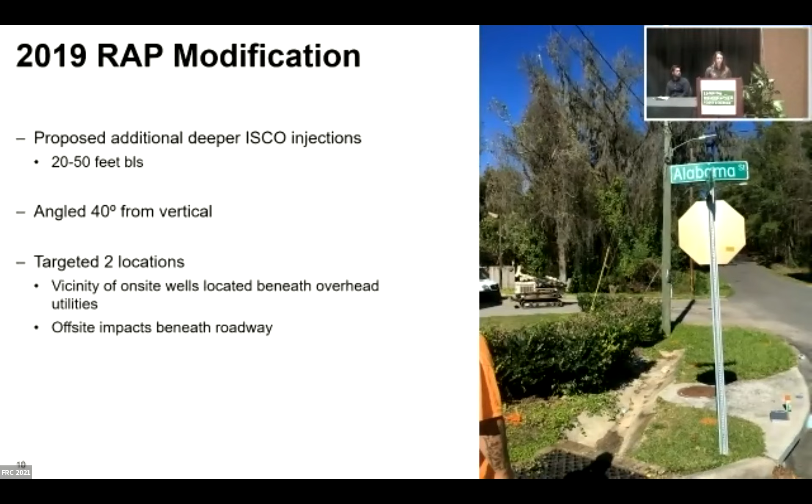The ISCO and bioremediation material that we selected for this project was PeroxyChem's Klozur CR. It's a single formulated product that consists of 50% high pH alkaline activated persulfate and 50% engineered calcium peroxide. And so it utilizes the strength of both of these products to treat the contaminant source zones as well as the down gradient plumes.

So the high pH activated persulfate is capable of destroying a wide range of petroleum contaminants through the generation of sulfate and hydroxyl radicals. And then we get the diffusion and transport of oxygen from the calcium peroxide that helps promote the degradation of the compounds in the down gradient plumes.

So the ISCO in the source area will typically last 3 to 6 months, while the long-term enhanced aerobic bioremediation will typically extend up to 1 year.

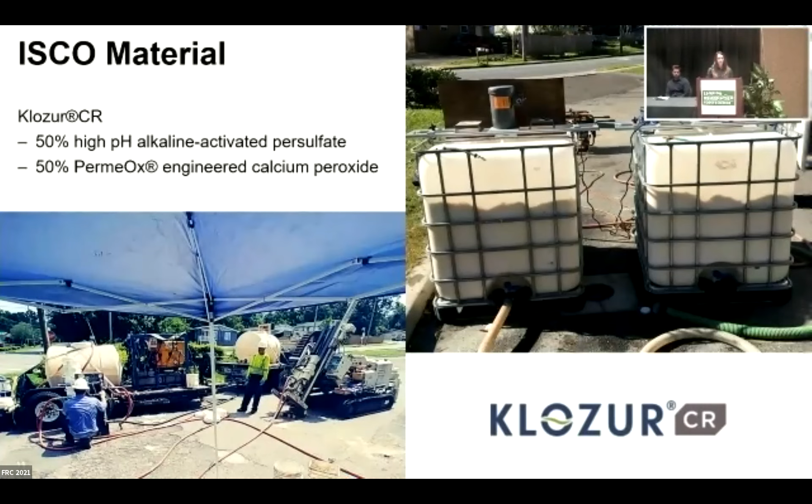And again, we angled those injection borings about 40 degrees from vertical to try and target those inaccessible areas beneath the power lines as well as underneath the roadways. In total, we injected about 7,400 pounds of Klozur CR into the subsurface during each event. And we again targeted that interval of 20 to 50 feet below land surface.

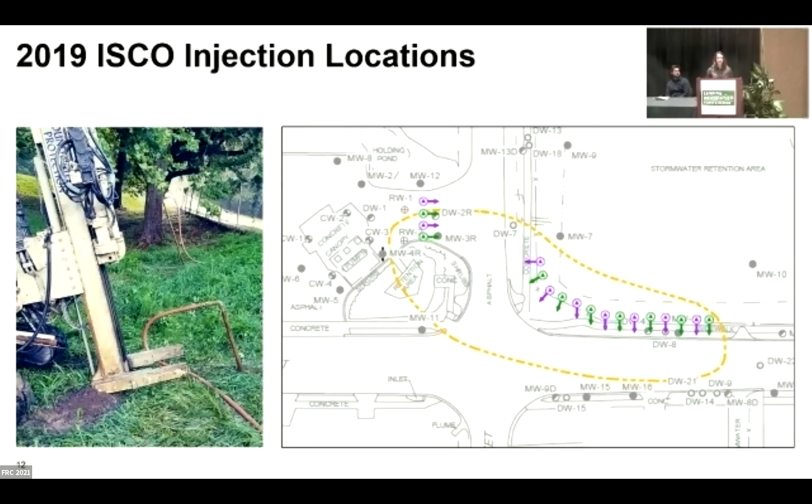So our first is monitoring well MW3R. This is a shallow well that intersects the water table, and it's located along the eastern boundary of the site. And it's one of those wells that's located almost beneath those power lines. And then our second well is DW4, which is an offsite deep well. It's installed to a depth of 51 feet, and it's located in the sidewalk south of that City of Tallahassee holding pond.

For example, the benzene concentration decreased from around 1,500 micrograms per liter to 88 micrograms per liter, which is a 94% reduction. And we also saw the toluene and ethylbenzene concentrations decrease from concentrations well above NADCs to below their GCTLs.

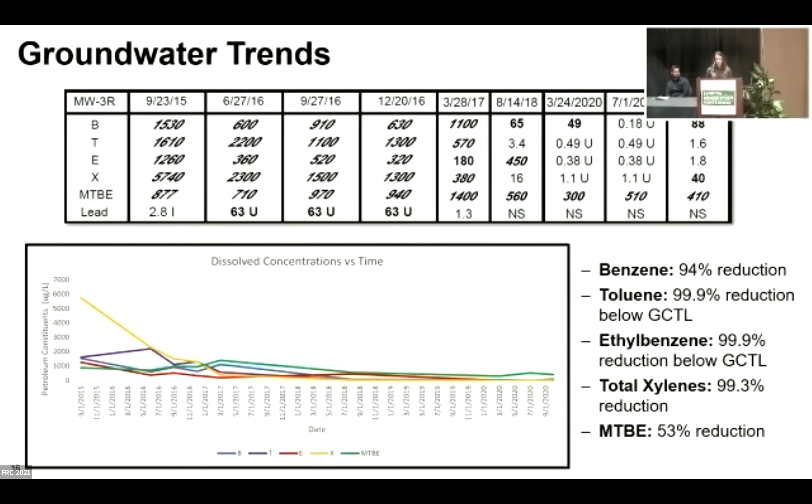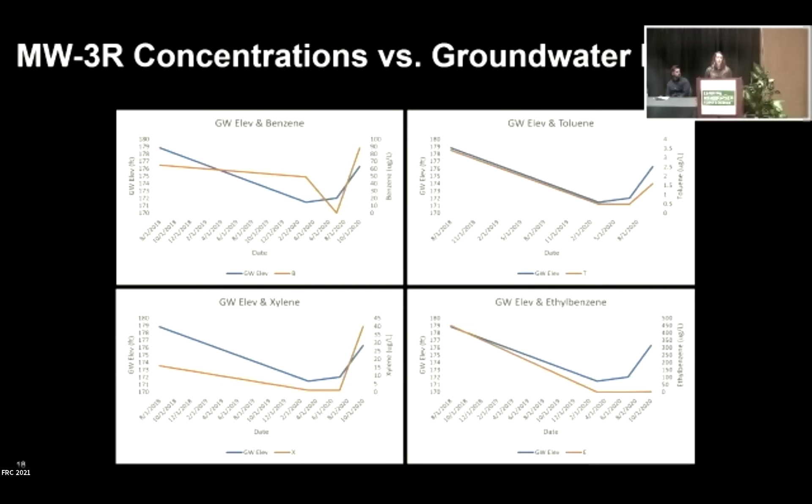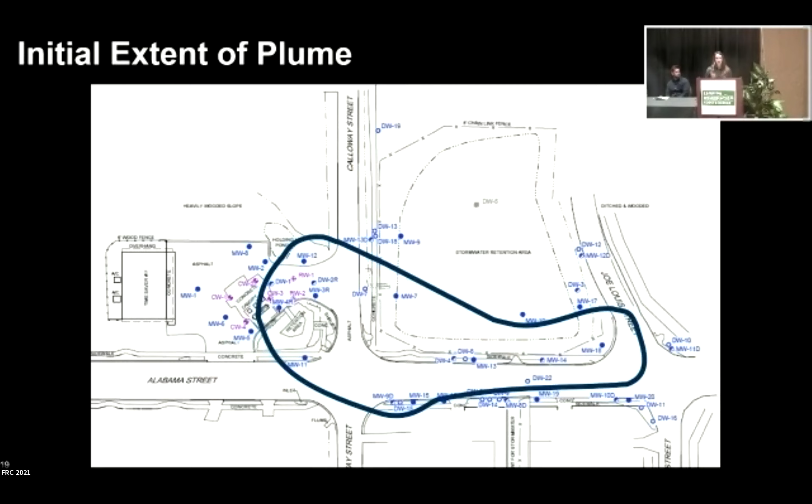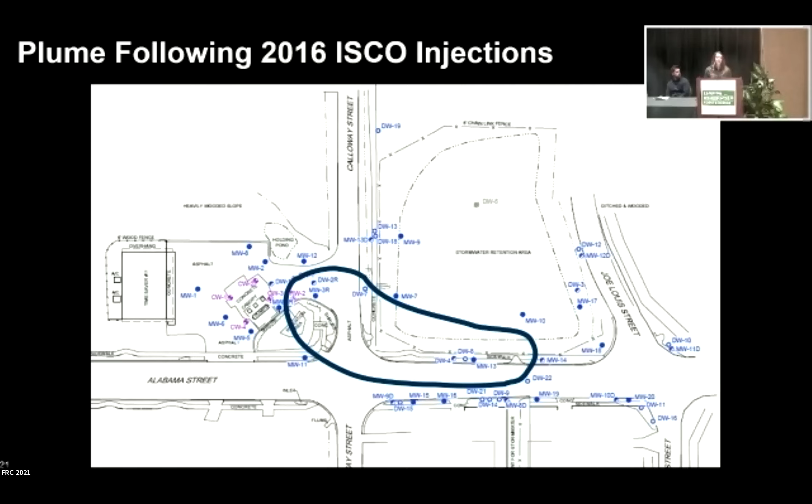Following the LDA source removal, although the bulk of the soil contaminant mass on site was removed, the groundwater plume was substantially unchanged. Then following the implementation of the injections beginning in 2016, we began to see a decrease in the extent of the plume, which continued following the 2019 injections to the current extent of our groundwater plume.

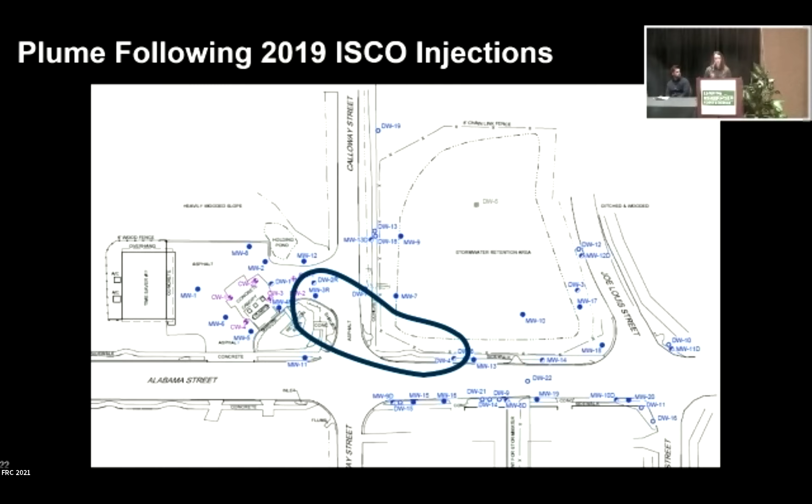In summary, there was a petroleum release at our Time Saver site that resulted in a significant on and off site groundwater plume. Multiple remedial events have been conducted, including the LDA source removal to remove the bulk of the soil contaminant mass on site, as well as multiple ISCO injection events to try and target the smear zone impacts, as well as the on and off site groundwater plumes.

The groundwater trends have revealed fluctuations in concentrations with changes in groundwater elevation, which reveals there may still be some inaccessible contaminant mass adsorbed to the soils. Unfortunately, the site has nearly reached its funding cap under the PLERT program, so additional action will be limited, and a conditional closure is likely the path forward. But our groundwater monitoring has revealed that the ISCO injections were highly successful in not only decreasing the extent of the plume, but also decreasing the magnitude of the concentrations present.

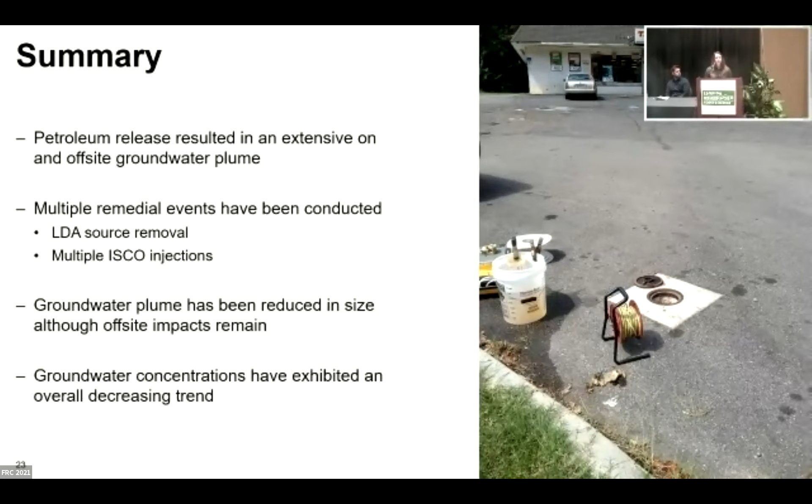And with that, we'll take any questions. Thank you.

Jenna, how much effect did the large diameter augers have on your strategy? Did you use calcium peroxide as an amendment when it was backfilled, and were you taking that into account when you designed the strategy? They did put some ISCO biomin material into those LDA borings when they performed those, so we knew there had been some attempt at that location previously. But we looked at the lithology of the site, as well as the success of the PeroxyChem chemical and other formations, as our best strategy for treating that groundwater, particularly the down gradient plume.

Hey Jenna, this is Sunil. Can I ask a question? Go ahead.

Was the conditional closure discussed with the owner before any of these later remediation efforts started? That I am not actually sure of. I know they had reached out to them because we were reaching our funding cap, but I'm not sure of the current status of the communication with the owner.